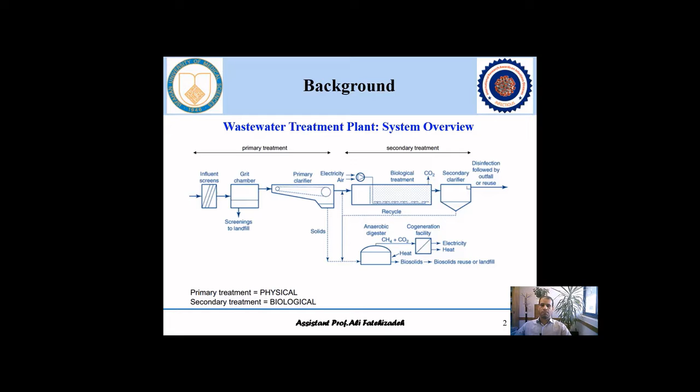excess sludge reduction and nutrient removal. Following water consumption, wastewater is produced in the community, and it must be managed before releasing to the environment to eliminate any threat to the environment and human health. Wastewater treatment always takes place in the wastewater treatment plant, and in this slide you can see the system overview of a wastewater treatment plant. Usually wastewater treatment is classified into primary and secondary treatment.

Primary treatment usually uses physical forces for removal of some constituents from wastewater, including trash, grit, and suspended solids, by applying a bar rack, grit chamber, and also primary sedimentation. The removed constituents from primary treatment, including grit and trash, are sent to landfill, suspended solids are usually sent to anaerobic treatment, and effluent water is sent to the next step of treatment.

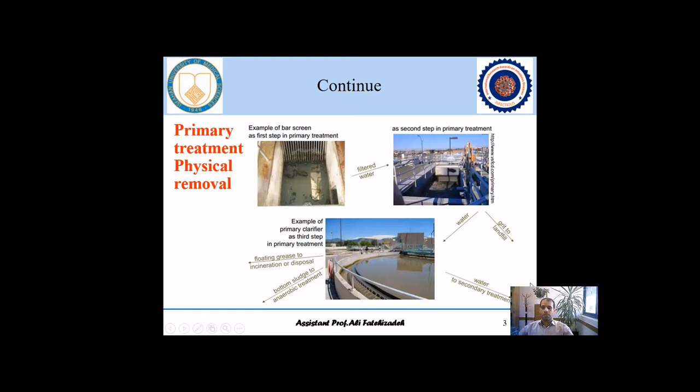After that, passing the mixture through the clarifier leads to solid separation from water, and it is able to return some of the biological sludge to the aeration tank to provide adequate concentration of sludge. Unfortunately, activated sludge requires a large volume to remove organic compounds and provide high effluent quality, and is also very sensitive to organic and hydraulic loading.

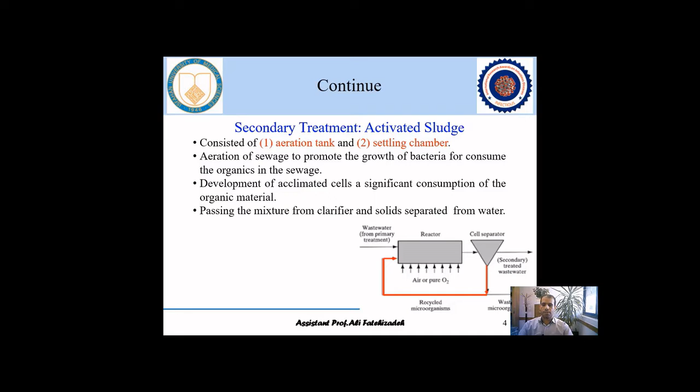The influent wastewater enters contact stage A, with high-rate activated sludge for BOD removal with low retention time around 1 hour, and then passes to stage B with a lower rate of biological loading for nitrification. In stage A, the short contact time leads to adsorption of organic matter without any oxidation. But in stage B, aeration is continued for at least 5 to 6 hours, which leads to oxidation of the adsorbed organic compounds.

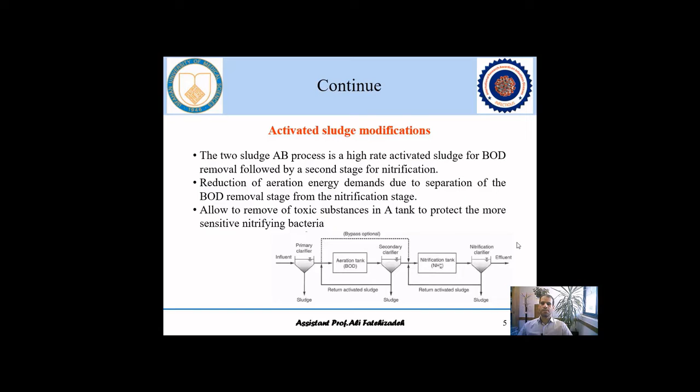The AB process can be operated with or without primary clarification, and separation of BOD removal from nitrification leads to reduction of aeration energy demand. In addition, toxic substances entering tank A can be removed, leading to protection of sensitive nitrifier bacteria present in tank B. Activated sludge has some advantages and also disadvantages.

The main advantages of activated sludge are removal of dissolved organic constituents, low maintenance, a destruction process, relatively safe, low capital cost, and easy to operate. The disadvantages of activated sludge are emission of volatile compounds, production of waste sludge, high energy consumption, and suffering from organic or hydraulic shock and also toxins.

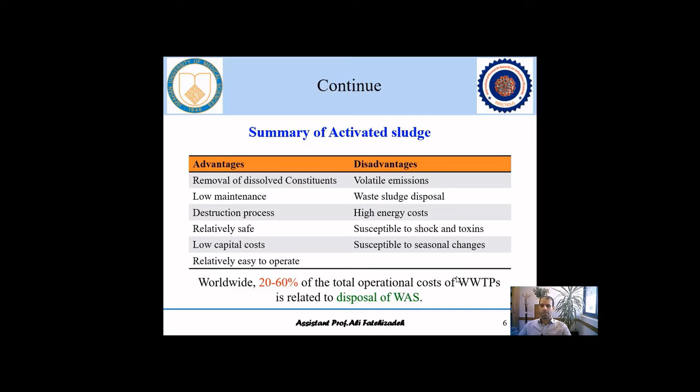Based on previous studies, the main disadvantage of activated sludge is production of waste sludge, and it is estimated that around 20 to 60% of the total operation cost of a wastewater treatment plant is related to management of waste activated sludge. Today, post-treatment by applying extra technology in the waste flow, and applying a strategy in the water line, are two distinct approaches to remove or reduce excess sludge production.

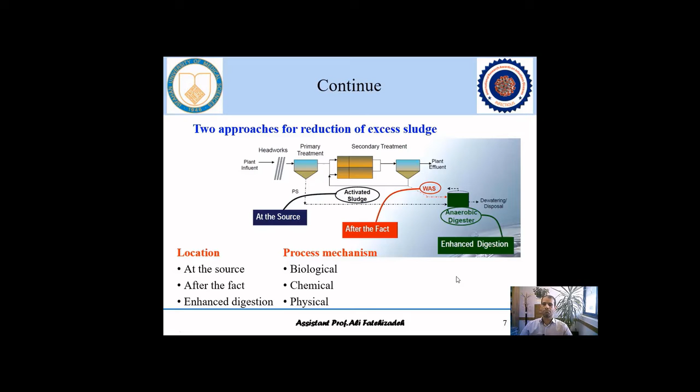As you can see, excess sludge reduction can be done at source, after the fact, and also by enhanced digestion by means of biological, chemical, and physical mechanisms. The reduction strategies in the water line can be classified into 5 groups, including endogenous metabolism, uncoupled metabolism, cell lysis cryptic growth, microbial predation, and also cell breakage. The main drawbacks of these methods are high capital investment and high operational cost requirements.

Among these methods, the oxic-settling-anoxic process, which we call OSA, consists of an anoxic or anaerobic tank in the sludge return line and is recommended as one of the most potentially cost-effective and low-impact alternative methods for excess sludge reduction. Moreover, ultrasonication is a cell breakage technique with high operation costs and efficient in reducing biological sludge.

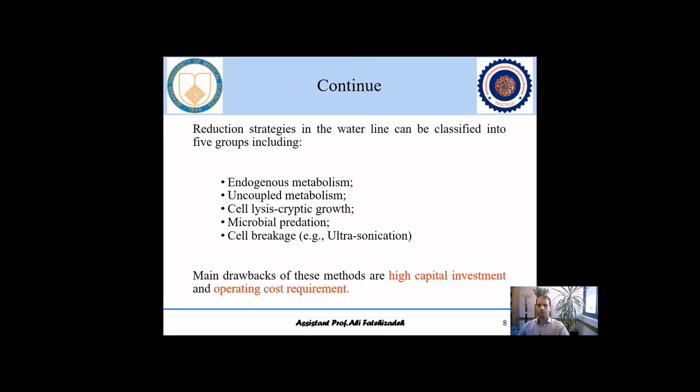The ultrasonic wave can break the sludge flocs, improve biodegradability, enhance release of organic compounds such as COD, protein, nucleic acid, and extracellular polysaccharides, and increase the permeability of bacterial cells. For this purpose, we aim to combine OSA and ultrasonic in a continuous AB process to evaluate its capability for biological excess sludge reduction and nutrient removal, and finally we aim to estimate the biokinetic coefficients of

the combined process. In this figure, you can see the aerial view of the North wastewater treatment plant as a traditional AB process. The operation of the North wastewater treatment plant started around 14 years ago, and it receives approximately 45% of the wastewater flow produced in Isfahan.

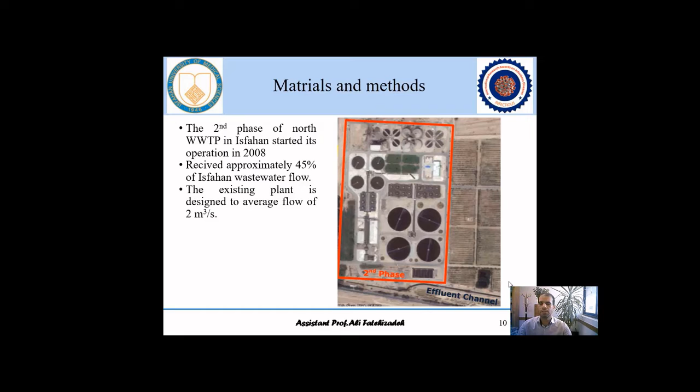The existing plant is designed for treatment of average flow of 2 cubic meters per second. The used AB process in North wastewater treatment plant of Isfahan is a traditional AB process without primary sedimentation. Here you can see schematic layout of AB process combined with US and OSA process.

The AB process was made from stainless steel and operated at ambient temperature. The study was divided in 2 distinct phases for 100 days. During first phase, the AB system operated as a traditional AB process with hydraulic retention time of 1 hour for stage A and 4 hours for stage B. The average of flow rate is 32 liters per second.

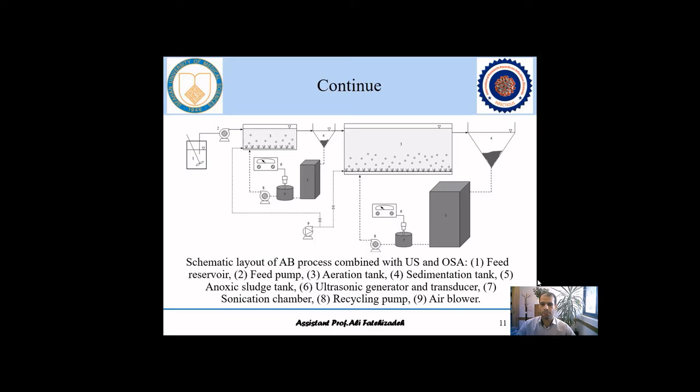Moreover, compared to AB process, the excess sludge production in combined process reduced at each MLSS around 50%, which indicated that the low ORP and US in return activated sludge line promoted the excess sludge reduction. The cycling of sludge in oxic and anoxic condition led to uncoupling metabolisms induced as sludge underwent no food and low ORP condition in sludge holding time.

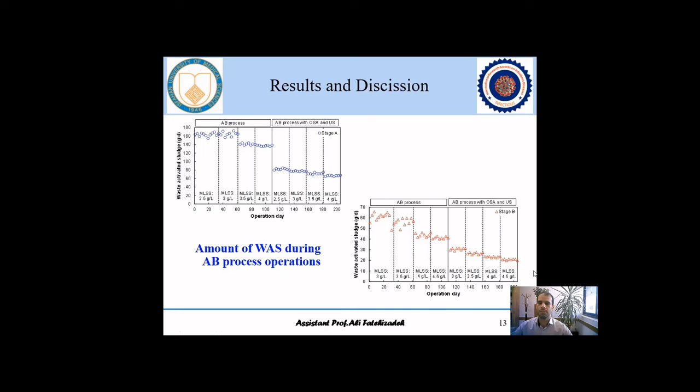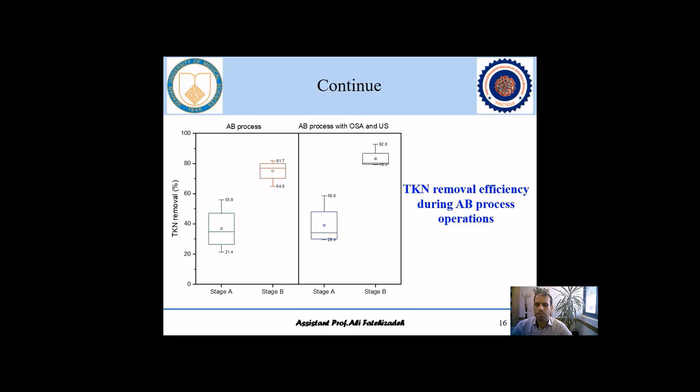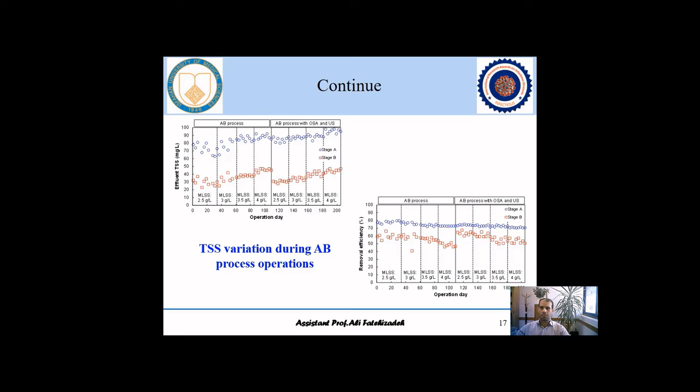Based on the obtained result, we can conclude that at each MLSS level, combination of OSA and US in AB process led to significant excess sludge reduction, around 50%. Compared to AB process, the COD removal efficiency in AB process with OSA and US slightly decreased, suggesting lysis phenomenon. And finally, an improvement in TKN removal ability of AB process was observed when OSA and US applied, demonstrating higher denitrification takes place in anoxic sludge tank. Thank you for giving me this opportunity to present our work.